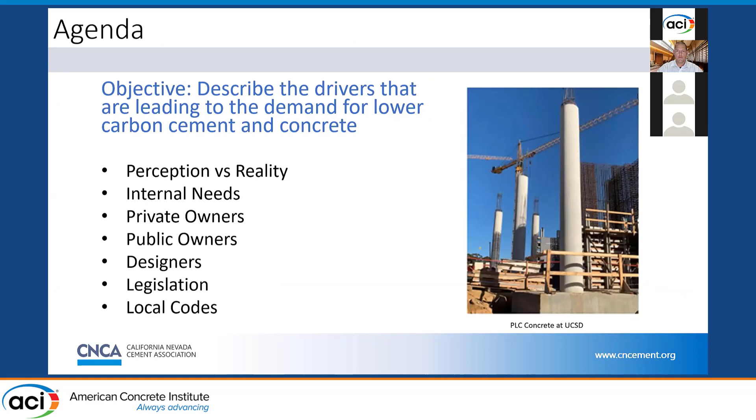Here are the things we'll take a look at today: perception of our industry, the needs of various groups of owners, designers, etc., some legislation we're seeing out in California, as well as some local codes, and where you might find more information about things coming down the pike in your neck of the woods.

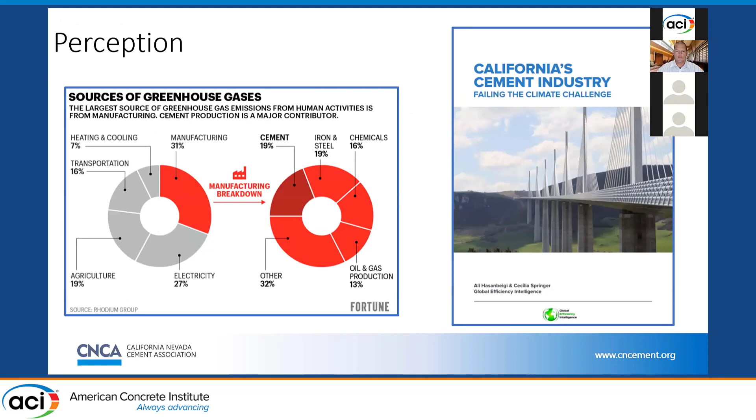So of course we've got the perception of the cement industry's role in global warming. You hear quotes often attributing 4, 5, 6, 8, 9, or 10% of the CO2 in the world to cement production. Of course, our favorite last year, The Guardian, with their Concrete Week and Cement Week, calling us out as the most destructive material on Earth.

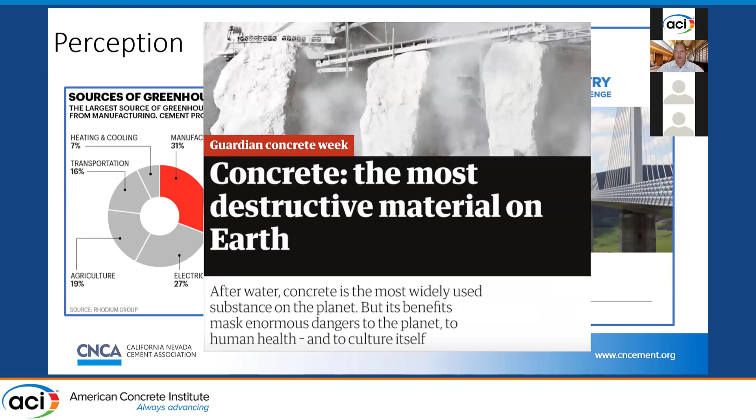The reality, as Rick mentioned, is found in the newest report from the Intergovernmental Panel on Climate Change, that attributed about 4% of the total fossil CO2 emissions to the cement industry, and they say in their report that the uptake from carbonation is about half of the carbon emissions from cement production. I didn't read deeply into all the assumptions that went into that. This report is not quite 4,000 pages, and I haven't yet found time to get into the details. Maybe somebody else can give me the Cliff Notes version.

Here in California, we represent about 1.8% of the state's CO2 emissions. The cement industry does. You can see transportation is the lion's share of emissions. We sure do love our cars out here in the Golden State.

We have some internal needs. Our industry here in California is committed to carbon neutrality by 2045. We didn't pick that date to one-up the PCA and their plan for 2050. You'll see why here in a minute.

We have just recently, as of Friday actually, got Portland limestone cement approved by our state DOT here. So that's available now for future projects, and they also introduced a directive allowing existing projects to switch over to Portland limestone cement.

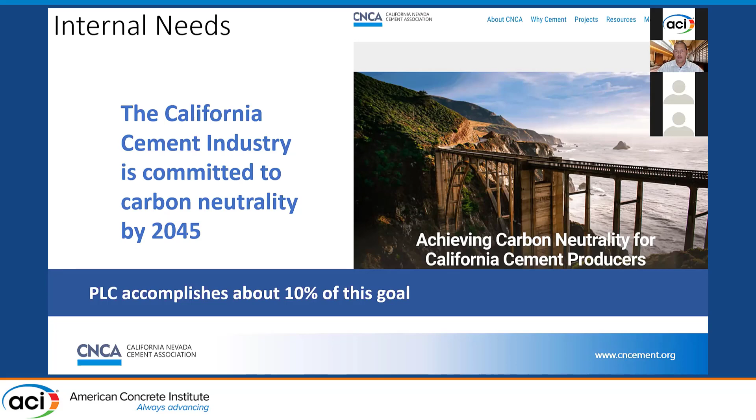So that's a nice deal there for us. Our commitment to carbon neutrality by 2045 was issued back in March, and you can find it on our website at cncement.org if you'd like to take a look.

We've got needs being expressed from private owners. I pulled a few examples of this from the web, general looking around on the internet.

Facebook's new headquarters in the Bay Area in California runs on 100% renewable energy and is a LEED Platinum certified building. The Apple headquarters in Cupertino, a $5 billion construction project, is LEED Platinum. Google now has over 12 million square feet of LEED Platinum certified buildings, and more all the time.

These big tech companies, big industries, are looking for LEED certified buildings, for lower carbon emissions, for lower energy usage, and they're driving that demand to their designers, their engineers, their architects, etc., and the demand is being met. Building green is a pretty big business.

This source I found from Statista.com estimates the size of the U.S. green building market at $81 billion a year.

Some of these contractors here—I'm going to thank James Bogdan for this information over at NRMCA—some of these big general contractors, you see Turner Group and AECOM, each with over 1,000 green accredited staff on their payrolls and doing big business in the multi-billions of dollars a year in construction.

So this is big business. And if for no other reason than you'd like to be a part of it, just know that there are a lot of dollars out there for you if you are.

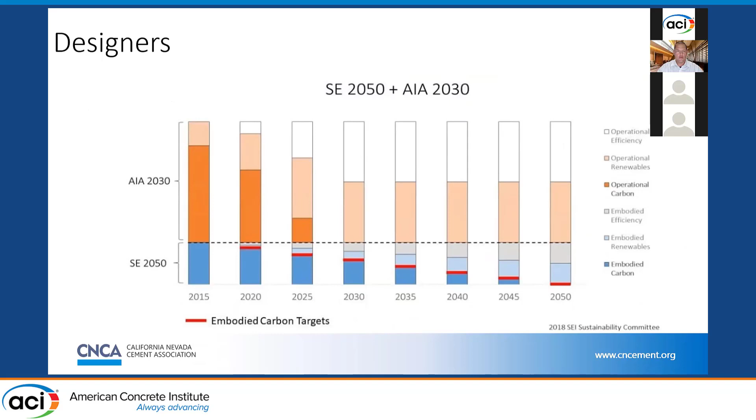Now we'll take a look at some environmental legislation that we have here in California. You might find some things interesting here, and it might be a harbinger of what's coming in your markets. We'll start off with the California Air Resources Board, established back in the Reagan era. Reagan was the governor here in California before he became president in 1980.

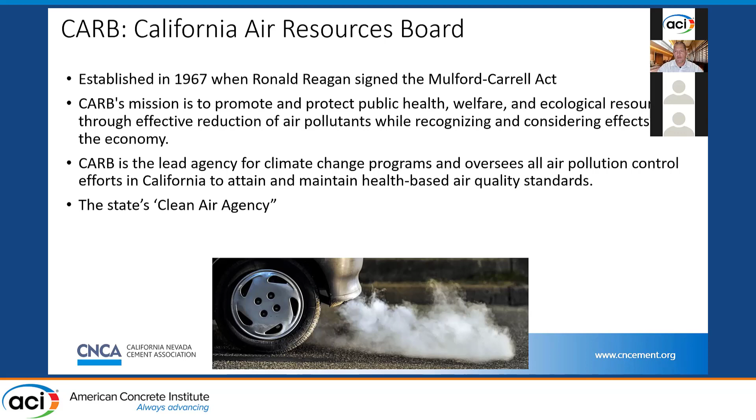This is the clean air agency in the state. Their main function for many years was essentially regulating tailpipe emissions from vehicles. You might be interested in knowing that California is the only state that can set its own vehicle emissions regulations. For a long time, you might have opened the hood on a vehicle and seen a sticker about it being 49-state compliant, or a sticker that said 50-state compliant, meaning California and the other 49 states. I think anymore, California's tailpipe emissions and federal tailpipe emissions are pretty well in alignment. You're not seeing a lot of differences in those vehicles now.

Much later on, Assembly Bill 32, the Global Warming Solutions Act, was passed, and this mandated that the state move back to 2000 levels of emissions by 2010, to 1990 emissions levels by 2020, and then to get to 80% below those by 2050.

As part of this, it authorized the California Air Resource Board that we looked at on the previous slide to institute a cap and trade program as a reduction, applying a price to carbon in an effort to reduce carbon outputs. So we put the state on a trajectory that looks like this.

You see this inflection point at 2020, and then a more downward trend below that. I'm happy to say that here in the state, we did in fact hit that number by 2020, and now we've moved beyond that and are continuing our march downward in emissions.

The cap and trade program is a pretty interesting one. California participates with Quebec, Canada, I believe it is. Essentially, the state's large emitters are regulated by the California Air Resource Board. They have to either purchase allowances to emit those tons of carbon, or in the case of the cement industry and some others, when it's recognized that that industry is subject to leakage -- essentially the concept that if an entity or an industry is over-regulated in California, they'll just produce cement someplace else and ship it in from China, Vietnam, India, or Arizona, other exotic places like that -- and offset it that way, where the California Air Resource Board doesn't have a lot of reach and control.

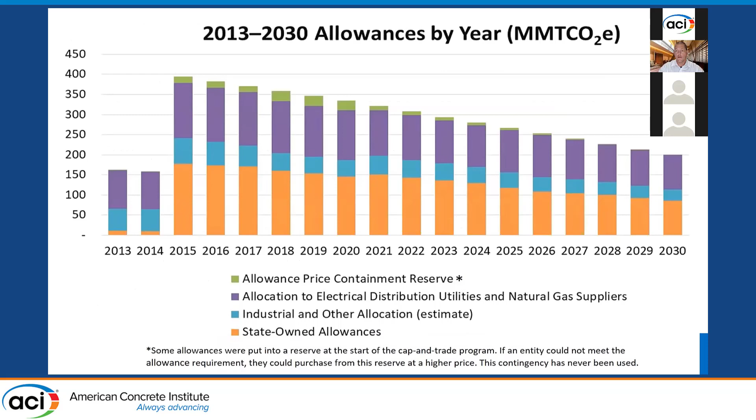It's pretty easy to see that if our industry can't stay underneath the caps, we get out of the realm of allocations, and the price of cement would start to come up very quickly if the industry had to start purchasing these allowances. This is what it looks like graphically, as far as what's out there year over year. This program currently expires in 2030. I have no illusions that that's going to be the case -- once these things are in place, they do tend to hang around.

Then in 2016, along came Senate Bill 32, which added another checkpoint, saying that we're going to be 40% below the 1990 emissions by 2030. So it put us on a new trajectory with a little kink in it there. That was a strange thing, right?

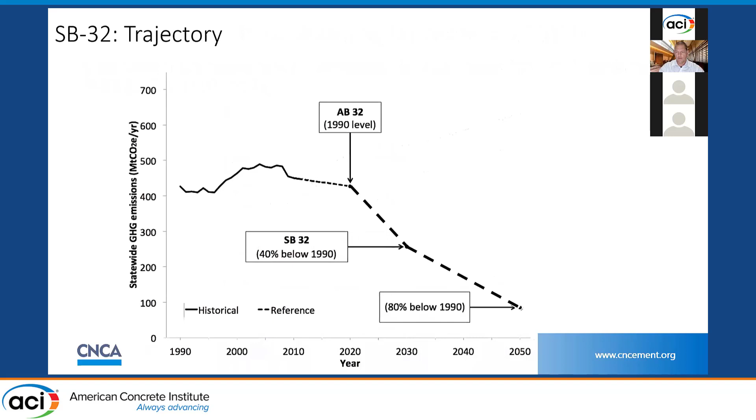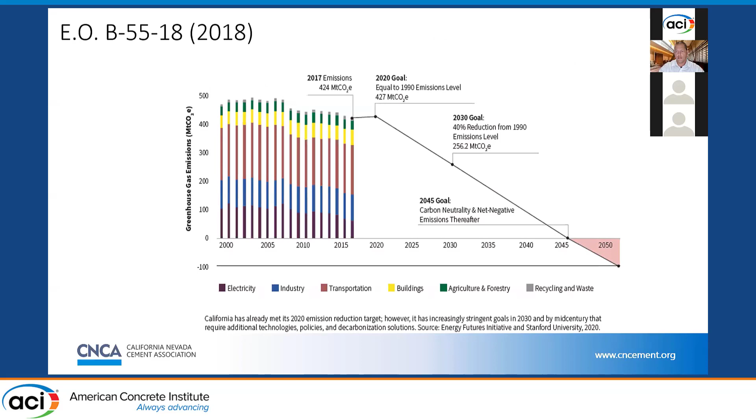To have a very steep trajectory between 2020 and 2030, but then a relaxed trajectory between 2030 and 2050. Not to worry, along comes Executive Order B5518 and a nice new graphic from Stanford University that backed up the mandate to get to carbon neutrality to 2045. And so that's why the carbon neutrality plan for our industry in California has 2045 as its end goal, and not 2050 like the national plan does.

We'll take a look at a couple of bills here that have passed and one that hasn't, that regulate GHGs. Assembly Bill 262, called Buy Clean California Act from 4 years ago, did initially have cement and concrete as one of the materials covered by this legislation. We were able to get it removed because this would be very difficult to implement. It currently covers just 4 materials you see here, essentially rebar, flat glass, mineral wool insulation, and structural steel. There's a handful of subcategories underneath those materials, about 12 different kinds of EPDs.

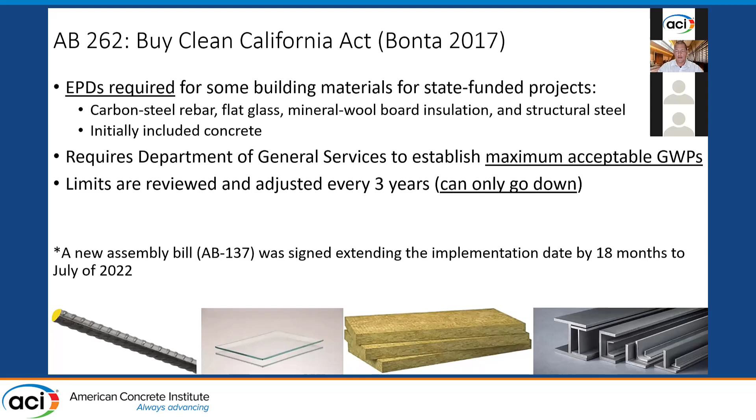The Department of General Services was tasked with establishing maximum acceptable GWPs for those materials. So now any state-funded project that incorporates those materials has to submit them along with an EPD showing that they're under the maximum GWP level. The limits get reviewed every 3 years and can be adjusted, but they can only ever be adjusted downward. That's part of the law. This has been difficult for them to implement, and as such, another bill was passed just this most recent session, kicking the implementation date out by another 18 months to summer of next year. We will see whether they're able to get this in line or not.

Another interesting one here, Senate Bill 778, Buy Clean Concrete. Despite concrete and cement being removed from the 262 bill we looked at a moment ago, there still is a desire in Sacramento to regulate that material. So this bill came out, which would have rolled out a maximum GWP for concrete. It would have required the California Air Resource Board come up with different classes, potentially compare them to regional averages. Those might have been the NRMCA regional averages, although it wasn't very specific in the proposed legislation.

Interesting thing in this bill, it also required all state agencies in California to use only performance-based specifications for concrete. And so while as an industry we support that, guess who is not quite ready for that? Our friends over at Caltrans. This would have required them to generate performance-based specs for all their concrete, and they'd have had about 6 months to do it. I think there's some folks on the line here who have some experience working with Caltrans, and they know that was probably not a reality.

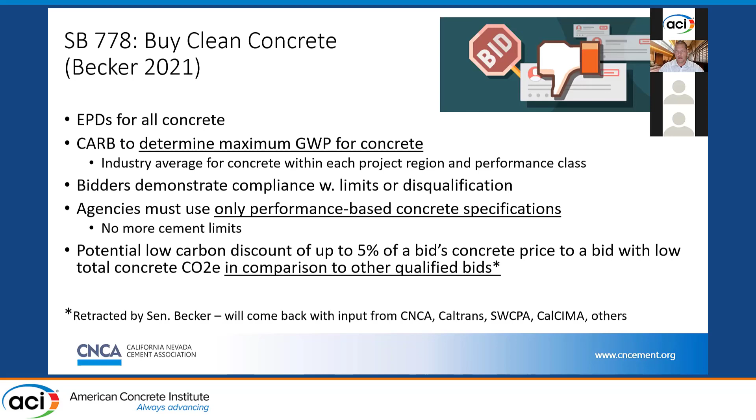But the biggest pushback on this came from the state, from the contractors in the state. This would have required them to submit their concrete suppliers and EPD information as part of their bid package, and their bids could be disqualified if the concrete proposed to be used was over that maximum GWP. It would also allow for a bonus potential if you were below your competitor's GWP. So that's pretty difficult. Fortunately, this bill was withdrawn by the author, Josh Becker, but we know it's going to come back in the next session. And we've indicated, of course, that we're happy to participate in helping to craft this legislation.

And the most recent one, which is now law, signed by our governor here just a few weeks ago, does specifically govern greenhouse gases from cement plants. It requires that cement plants achieve net zero or net negative emissions by 2045, requires our friends at the Air Resource Board that we talked about earlier to have a plan in place in about 2 years. It also has that same checkpoint that SB 32 had in it for that 40% below 2019 levels by 2030, and also specifically mentions imported cement.

Now, you might think that this would be the kind of thing that we'd pull out all the stops on to try to put a stop to, right? Who in their right mind wants their industry specifically mentioned in legislation and specifically governed and limited in terms of what the emissions can do? But you'd be wrong. We actually are supportive of this measure. We helped Senator Becker craft the language in the measure. We testified on behalf of it in committee and celebrated it when it passed.

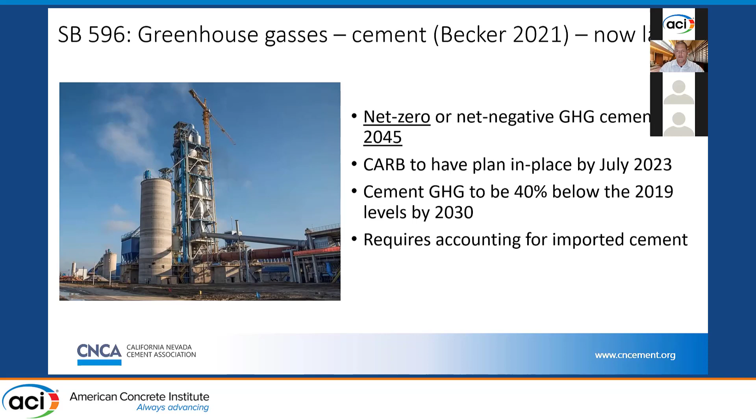And you might be ready to call us crazy out here in California, all the granola eating fruits and nuts. But the reason for it is this: this is an excerpt from our carbon neutrality plan. And all of these check marks that you see within the boxes that require legislative assistance or require regulatory assistance, in other words, things that are not necessarily within our own control here in our industry, by making the mandate that our industry become carbon neutral by 2045, we have essentially been able to put in place a law that will require other parts of the state government to help us achieve our goals.

I mentioned at the top that Portland limestone cement is already in place at a state level, so maybe I could have made that box a little smaller. But we have lots of other things we're working on. I haven't yet had the opportunity to read the PCA's plan that Rick was talking about, but I suspect we'll see a lot of similar things in both plans.

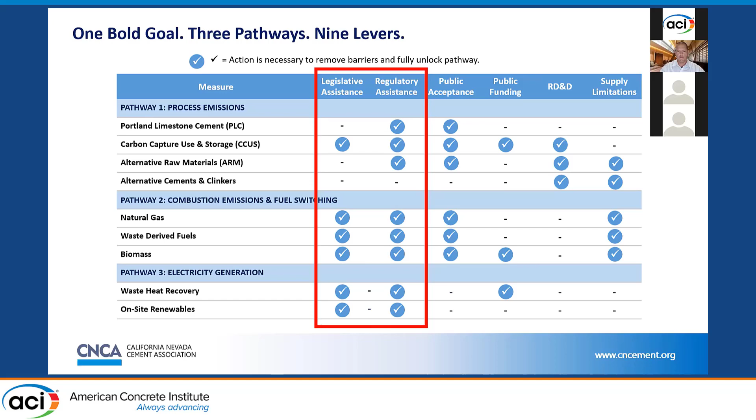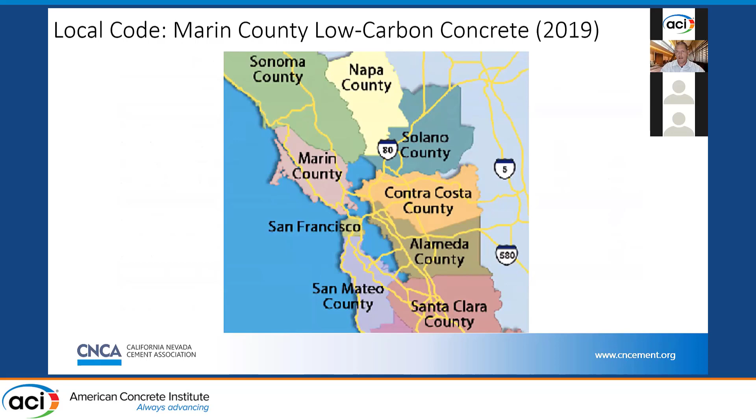I also want to talk about a local measure some of you may have heard about: the Marin County Low Carbon Concrete Building Code. Marin County is in the Bay Area, the North Bay area. If you drove north out of San Francisco across the Golden Gate Bridge, when you got off the bridge you'd land in Marin County. They instituted a low carbon concrete code a couple of years ago, and it's got some interesting things in it.

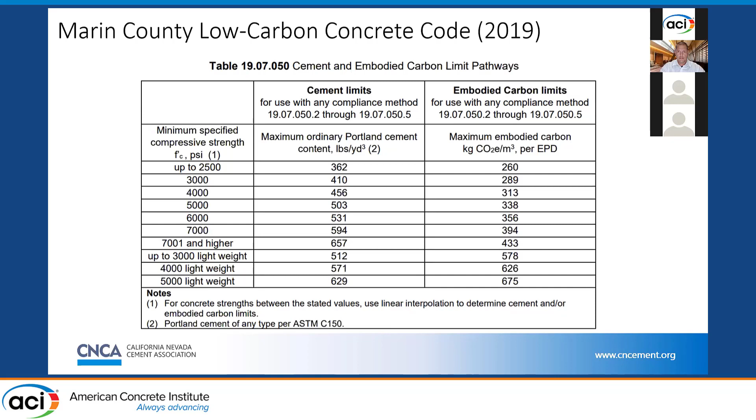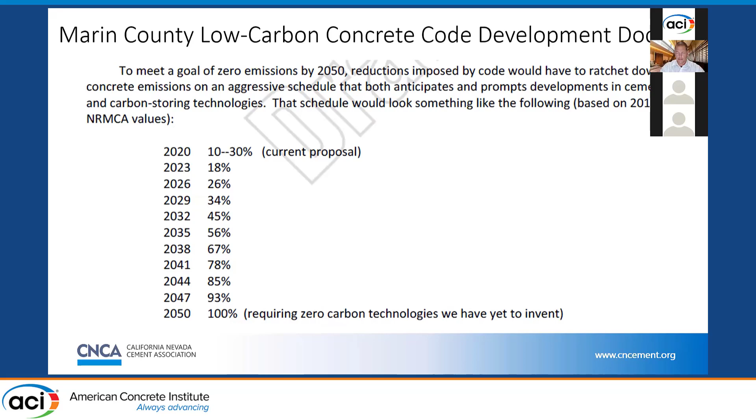Finally, I'll leave you with a tool: the Carbon Leadership Forum Policy Toolkit. This is a group of folks very concerned about embodied energy and embodied carbon, specifically in building materials - lots of architects and structural engineers involved. They maintain a nice site of pending legislation in different places.